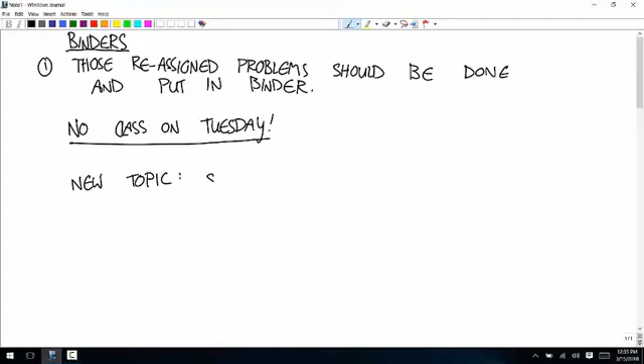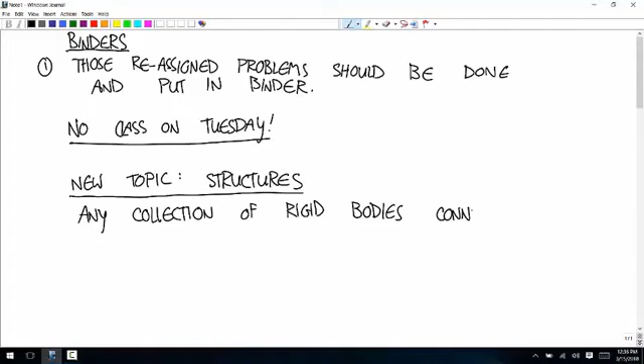Structures. A structure is any collection of rigid bodies that are connected by joints that are in static equilibrium.

If you have a collection of bodies that aren't in static equilibrium but are connected by joints, that's what we talk about in dynamics, and that's called a linkage.

So, in parentheses, a collection of rigid bodies connected by joints that's not in static equilibrium is called a linkage. Okay, so we're doing structures. It's very similar to linkages, but linkages are things that move.

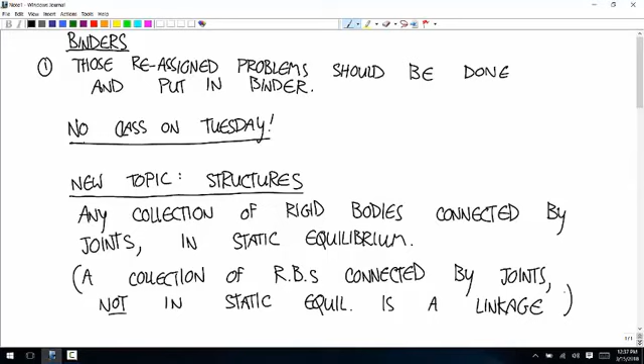Examples of linkages are drive shafts in an engine connected to the pistons, or the bones and joints in your body are a linkage.

Structures are like the trusses that hold up bridges, the frames of buildings, those kind of things. Any time you see stoplights on a big pole hanging out over the street with things connected to it to keep it from falling, that's a structure.

I do structures pretty differently than anyone else, and so I'm going to explain why, and we'll talk a little bit about the approaches that are used more often in statics. I just want to introduce the way that I'm talking about it.

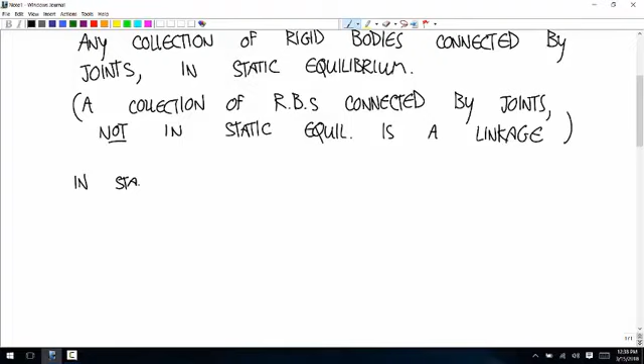In statics textbooks, and in a traditional approach to statics, structures are broken up into two categories.

The first one is trusses. And the requirement for a truss is that every member is a two-force member.

By the way, this is good stuff for quizzes, so pay attention to the stuff that I'm writing here. Anything where I'm making numbered bullet points and stuff, that's good candidates for quizzes. So every member is a two-force member.

Right, it's canceled. No, we'll just go to the next one that's scheduled on the syllabus. I think it's the 29th, maybe.

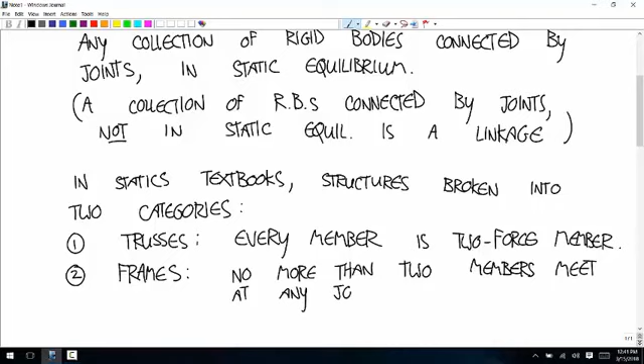And then the other category is frames. The requirements for frames are: no more than two members meet at any joint, and second, no external loads are applied at the joints.

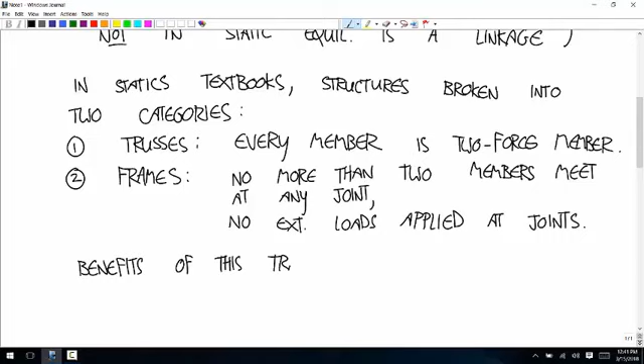The benefits of this approach—I'll call this the traditional approach—are first, a lot of times you get a big reduction in the number of equations, the size of the system of equations you have to solve is reduced.

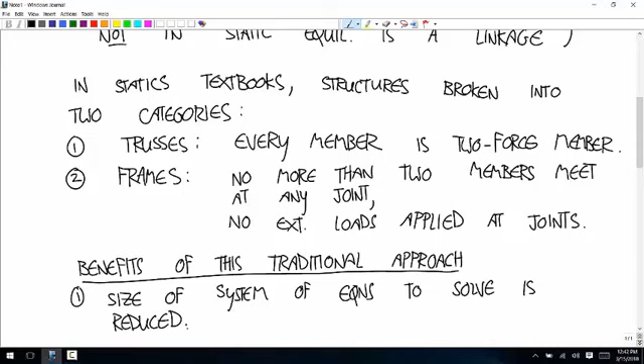Well, I said benefits, there's really only that benefit, but that's a significant thing to consider. It can be faster to do these calculations by hand.

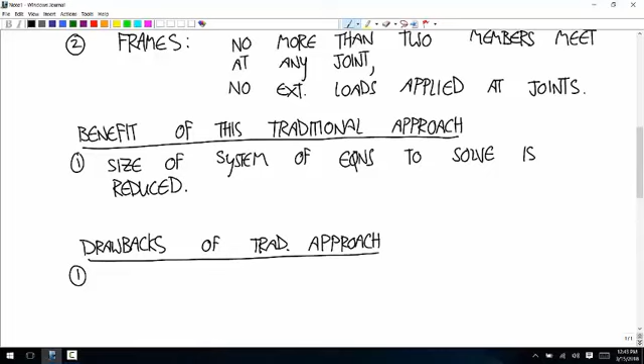There are two main drawbacks. The first one is that before you can solve a problem, you have to carefully classify it, and it's not always super easy, especially six months after the class, to be clear to yourself about which category you're talking about. So you need to classify the structure you're working on accurately in order to use the right technique.

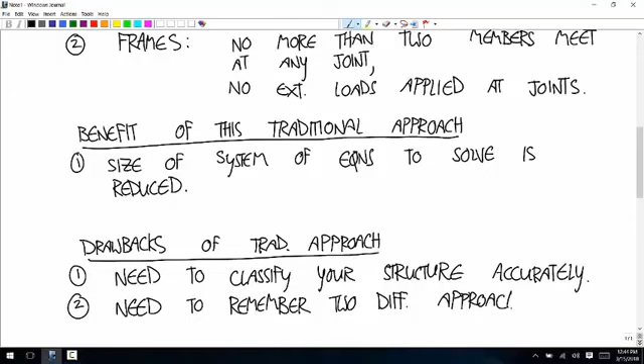And you need to remember two different approaches. I guess there is a third drawback: not all structures fit into either one of these two categories, so some structures aren't solvable with either of these two approaches.

Okay, so we're going to spend most of our time on our approach: a single method that works for everything. So you don't have to worry about remembering these two different approaches and classifying problems and stuff like that.

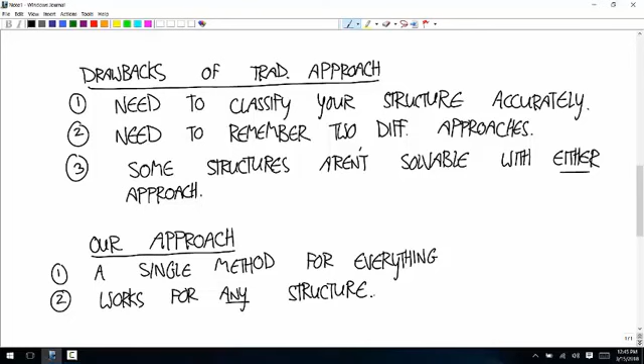It works for any structure, so there are no gaps in this. The downside is that in a lot of problems, if you classify them accurately, especially with truss problems, and use the truss simplification, treating it like a truss goes faster than doing this. So this is a slower way to do it by hand, especially compared to truss simplification.

But in defense of this method, these two approaches, like the truss simplification, people used to use this when engineers did hand calculations of gigantic trusses, estimating loads on bridges with tons and tons of members, and there was no easy way to use hand calculators or computers to do the calculations for you. I don't think anyone here is ever going to be in a professional environment doing hand calculations of big structures. If that's part of your job, either you or someone else will have written software to do it.

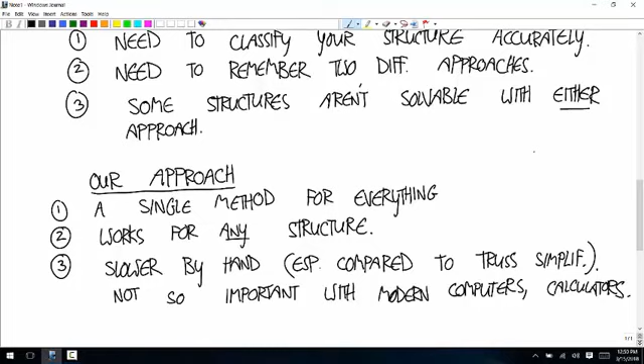All right, so what's the goal with structures? So what does it mean to solve a structure? What's the goal?

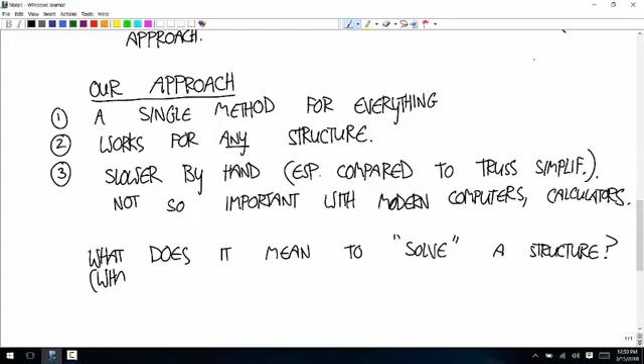Okay, let me just draw this. So let's say we have a collection of members like this, and a roller over here, and there's a force of 10,000 newtons there, 5,000 newtons there. So there's a structure—what does it mean to solve it?

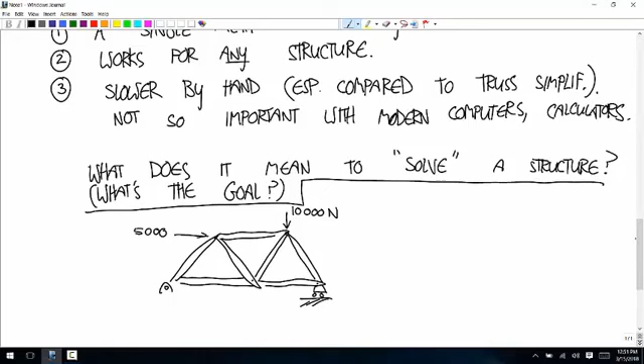It's solved when you know the external loads on each individual member.

Right now, first we'll treat this whole thing as a rigid body, and we can calculate the reaction loads here and here—that's all stuff you already know how to do. Once we do that, we know all the external loads on the entire structure as a whole. But we've solved this structure once we can look at this member and calculate all the external loads acting on it, and look at this one and know all the external loads acting on that.

So we want to be able to break it apart and know the external loads. You can probably imagine the benefit: once you have the external loads on one of these members, you have information you can use to figure out, am I worried about it breaking here? Am I worried about this one breaking? And that goes into the stuff we'll do when you take deformables.

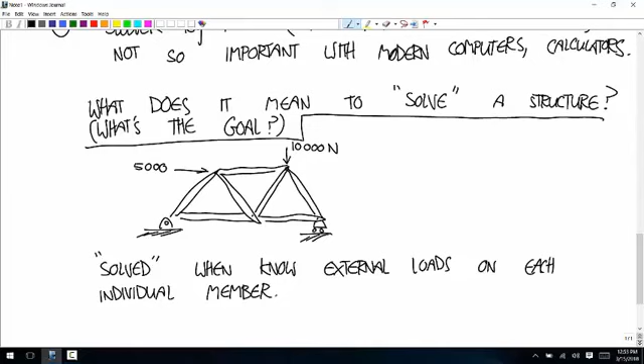So first, we're just going to think our way through it. Then after I'm done with that, I'll give you a set of general steps that you're just going to have to do a bunch of problems to ingrain. And by that point, you'll go outside, see structures everywhere, go home and calculate the internal and external loads. When you get to that point, you're really screwed.

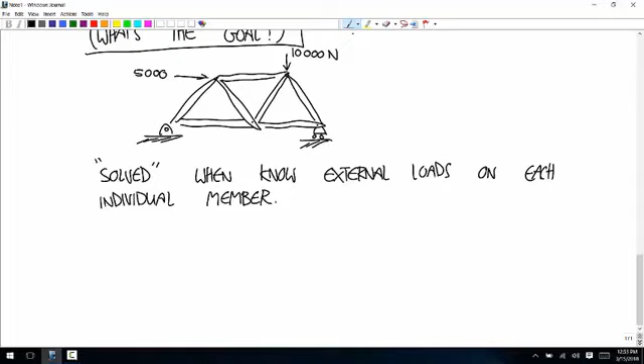Okay, so here's the first example. There's a pin joint on the left, connected to a member like that. It's connected by a pin joint to a member over here. This looks a little crooked, but it's supposed to be equilateral—I'm going to fix it.

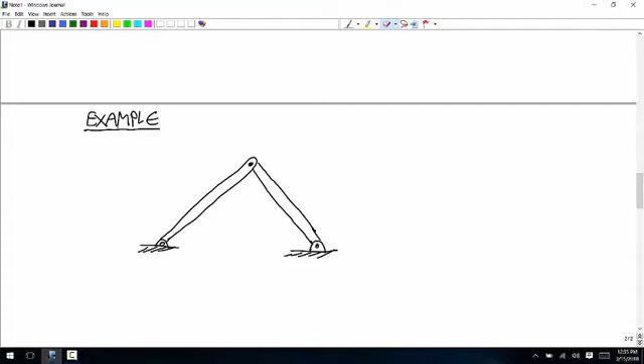Okay, and there's a pin joint connecting them here. And let's say that all these angles are 60 degrees, so it's an equilateral triangle.

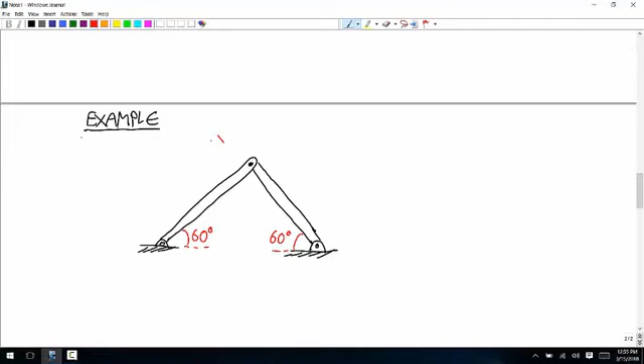And all the lengths are 1 meter. And there's an external load applied this way of 500 newtons.

And just so we can refer to these, I'm going to call the joint on the left A, the one connecting the members B, and the one on the right C. And then I'm going to call the member on the left member 1, and the member on the right member 2.

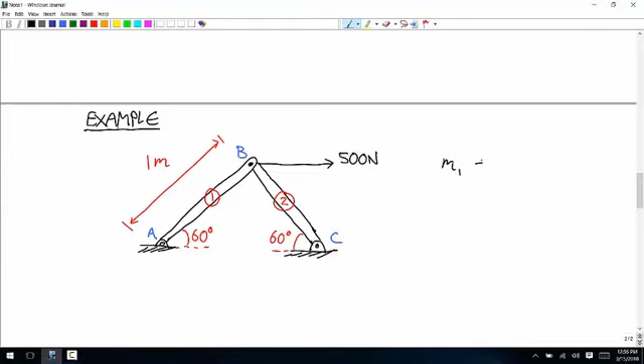And then I'm going to say that the mass of member 1 is equal to, what should we say, 10 kilograms. And that's also equal to the mass of member 2.

As structures go, this is a pretty simple structure, right? But just to bring out the point of the gaps in that traditional way of doing structures, this simple structure cannot be solved by either of the two traditional methods of solving structures. You could do this calculation if we ignored the weights, and the weight isn't going to make a big difference here. That 500 Newton force is a lot bigger than the weights of, well, I guess 100 Newtons. So it'll make some difference, but not that much. But using the traditional methods, you'd have to ignore the weights. If you want to put the weights in, you're stuck. But our way will work fine for this.

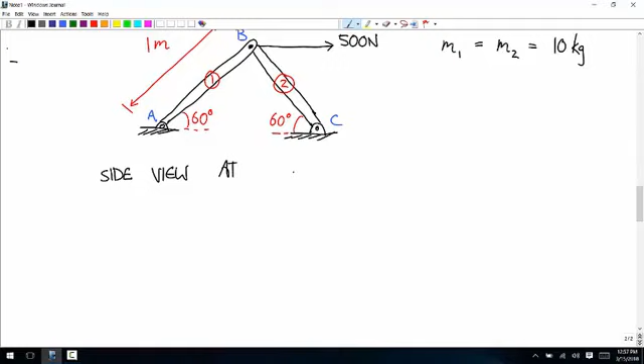Okay, so what does it look like up at the, let's think of a side view at joint B. Can you picture what I'm trying to get at there?

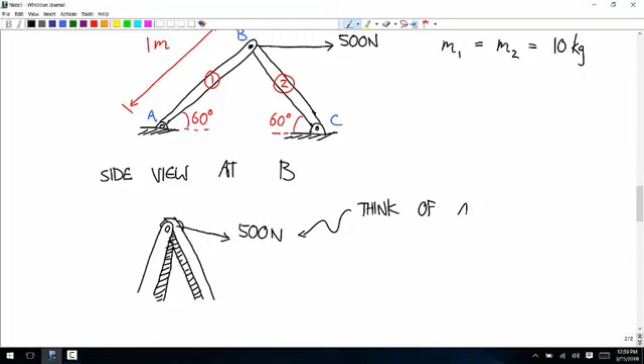And we're going to assume that that 500 Newton force is applied right at that joint. Here it looks like that 500 Newton force is applied to member 2, the way I have it drawn here. But it doesn't change anything in this problem to think of that force as applied directly to the pin that connects those two. We're going to think of this as applied directly to the pin.

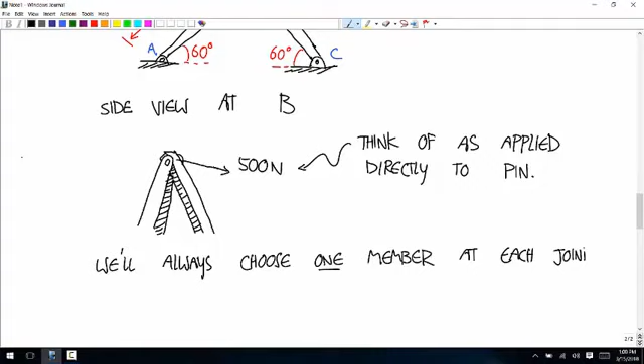And another thing that we're going to do, this is sort of a key thing in this approach: we'll always choose one member at each joint to lump the joint into. It doesn't matter which one, although I'll give you the way that I do it. You just need a consistent approach to which one. So what I'm going to always do is, this is member 1 and this is member 2. I'm going to always say that of the members connected at a single joint, I'm going to assume the pin is part of the lower number of those members.

So instead of treating the pin like its own thing, which it perfectly could be, I'm going to just, when I do free body diagrams, include that pin as part of member one. And so with my approach, this 500 Newton force is applied to member one, even though here it looks like it's applied to member two. It turns out if you had it applied to member two instead, it all comes out the same. But what you can't do is treat it like this 500 Newton force is applied to both of these two members. Then what you're really doing is treating it like this is a 1,000 Newton force and everything's off.

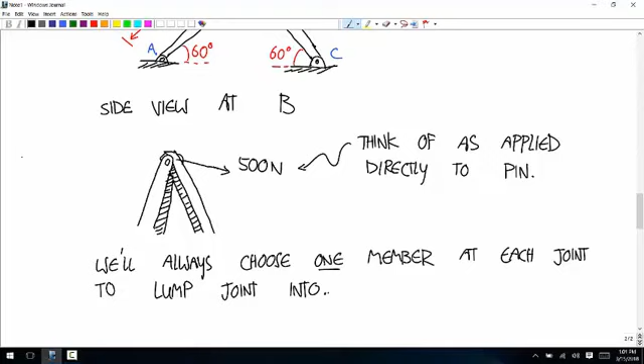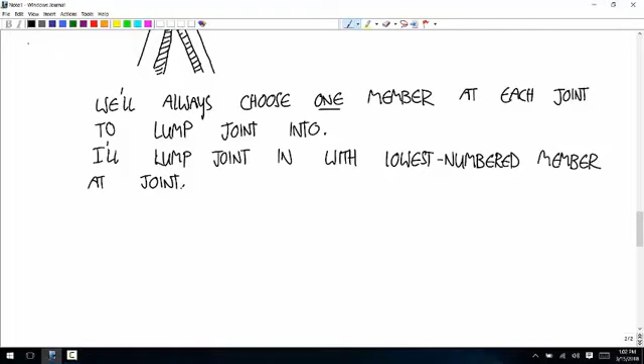So I'll always lump the joint in with the lowest numbered member that's at the joint. So in a really complicated truss, if you have a joint that connects members 15 and 12 and 9 and 40, the lowest numbered member connected to that joint is 9. So I would say the pin is part of member 9.

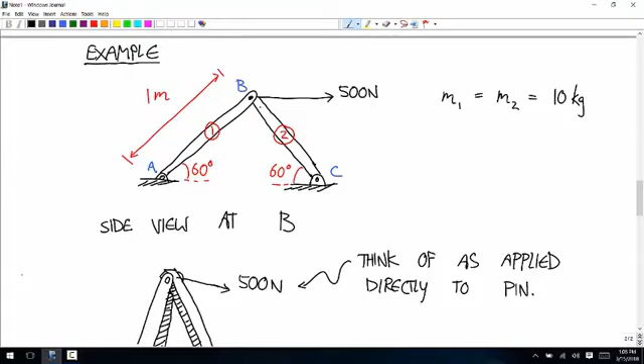Okay, well, if we're going to calculate the external forces on these members, we're going to have to isolate those individual members. So I'm just going to go through one by one. I'm going to first use Newton's laws for member 1. Then I'm going to use Newton's laws for member 2. We're going to have a bunch of variables, a system of equations, and as soon as you have as many equations as you have variables, you can solve it. So first, member 1.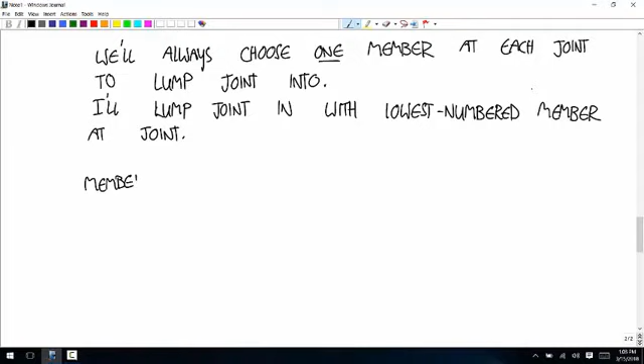What loads are applied? Yep, there's a 500 Newton force here because I decided to treat that joint as if it's part of member 1. I'm just lumping those two together. What else? Yep, there's a pin joint connecting it to the ground. I'll call that the force. Since that's joint A, I'll call that reaction at A. There's the weight, and that's acting at the center: 10 kilograms times 9.81, 98.1 newtons.

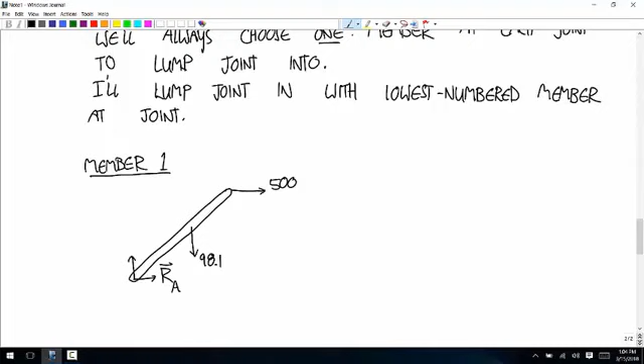And then there's one more. So if you go around the boundary looking for where the surroundings make contact with the boundary, there's one more contact that we haven't put in there yet. Yeah, there is the force that member 2 is applying to the pin, which is part of member 1. It's a pin joint, so that's an unknown force vector. And I'm going to call that the force on 1 by 2.

And I'll write out rho, force, moment.

Yeah, that's a great question. So the answer is no, we can't. Not yet. But when we isolate the other member, we're going to have a force on 2 by 1, which is negative F12. And so we'll end up with a system of 6 equations for 6 variables.

Okay, so I'm going to choose the about point here. You can put it wherever you want. I'll start out with the force RA. The rho vector is 0, 0. The force vector is RAX, RAY. Cross product is 0.

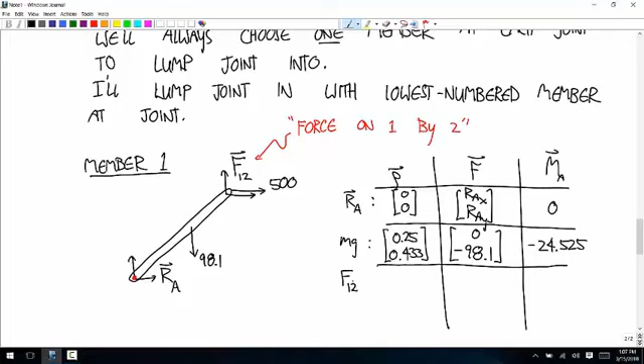And then the force F12, the rho vector is 0.5, 0.866. The force vector is F12X, F12Y. Cross product is 0.5 F12Y minus 0.866 F12X.

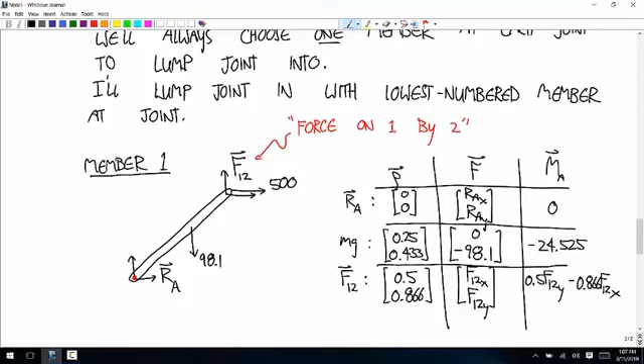And then the last one is the 500 Newton force. That has the same rho vector, 0.5, 0.866. The force is 500, 0. And so you get negative 433.

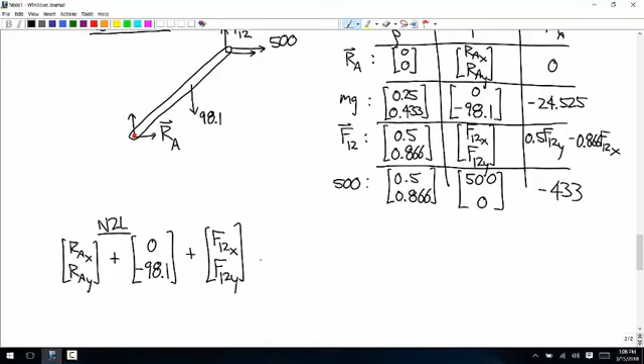So the equations, Newton's second law says RAX, RAY plus 0, negative 98.1 plus F12X, F12Y plus 500, 0 equals 0, 0.

And the moment equation says negative 24.525 minus 0.866 F12X plus 0.5 F12Y minus 433 is equal to 0.

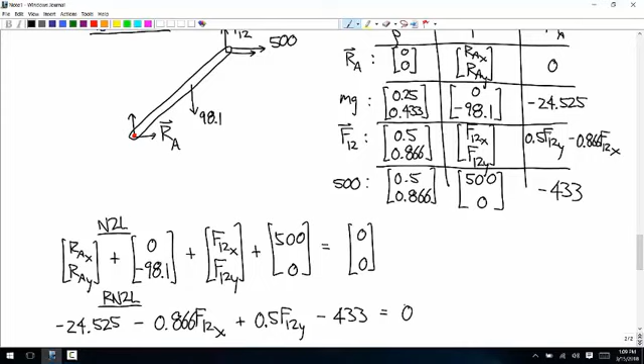Okay, so we did all that for these three equations. And like you pointed out, we have 4 variables and 3 equations. We can't solve anything yet. I'm just going to write out these 3 equations.

So our first one says, and I'm going to put them in the form that we're going to use for reduced row echelon form. So 1 RAX plus 1 F12X is equal to negative 500. Second equation says RAY plus F12Y is equal to positive 98.1.

And the third equation says negative 0.866 F12X plus 0.5 F12Y is equal to 457.525.

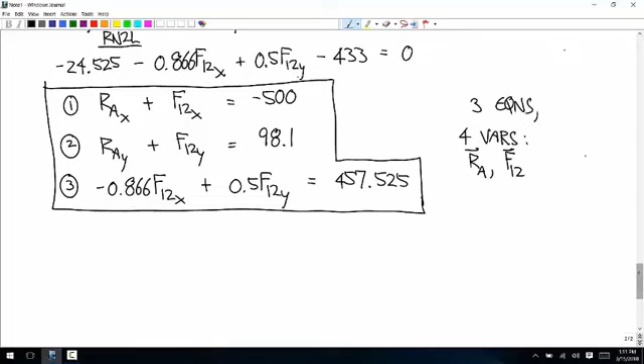Okay, so now we'll isolate member 2. There's a weight force of 98.1 at the midpoint. It's connected to the ground by a pin joint, so I'll call this unknown force vector RC.

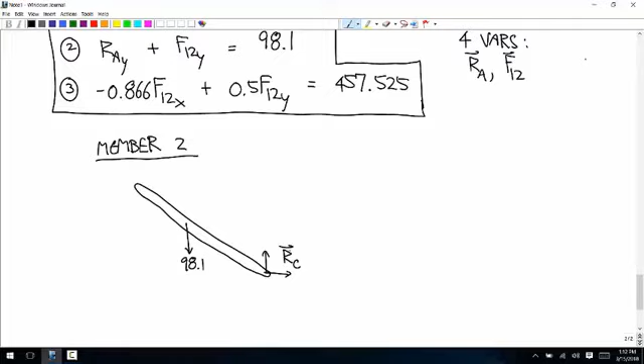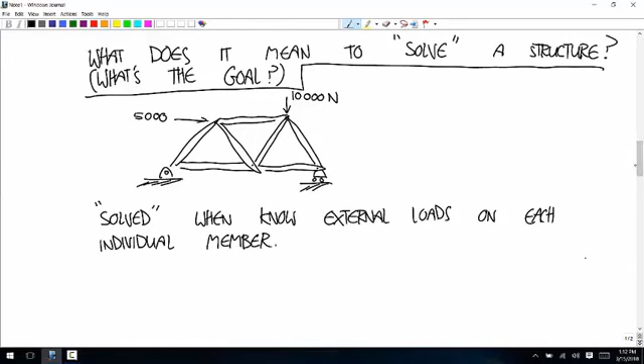Yes? This one is a pin joint. In the example I did before that, there was a roller, yeah. But for this one, they're connected by pins. By the way, if we were doing this problem where there was a third member like this, then we would need this to be a roller for it to be statically determinate. But that's a pin there. Basically, it's like a 3-member structure with the ground being the third member.

Okay, and then what's happening up here? This is the most complicated part. Always the most complicated are the joints where the 2 members are in contact. Well, the pin is part of member 1, so that 500 Newton force is not applied here. But this member does touch the pin, okay? And the pin is part of member 1. So there's a force on 2 by 1.

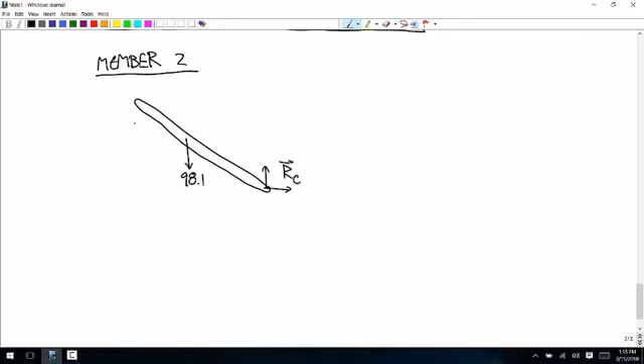If we called this variable the force on 2 by 1, we would have 8 variables in our system. We'd have the variables RA, X and Y components, F12, X and Y, F21, X and Y, and RC. And we wouldn't be able to solve it. But Newton's third law says that F21 is equal to negative F12. And so we're going to write this in terms of a variable we've already defined, and then we only have 6 variables in our system. Okay? So that's a key part of this.

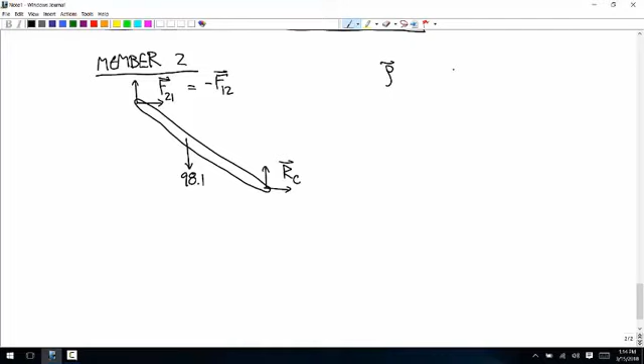Moment. I'll put the about point down here for this member. So first, the force RC. The vector is 0. The force vector is RCX, RCY. 0 moment.

Then the weight force. The rho vector is negative 0.25, positive 0.433, and the force vector is 0, negative 98.1. And that cross product is positive 24.525.

And then the last one is negative F12. The rho vector is negative 0.5, positive 0.866. The force vector is negative F12x, negative F12y. Those negatives are because of Newton's third law. And then the cross product is 0.5 F12Y plus 0.866 F12X.

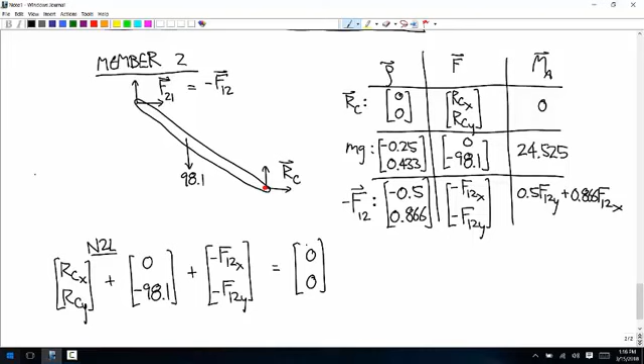And the moment equation says 24.525 plus 0.866 F12X plus 0.5 F12Y is equal to 0.

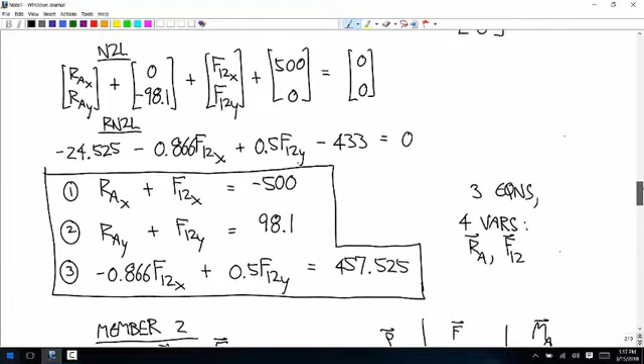Yes? Yes, and I think the easiest way to make sense of that for yourself is just to think, when we isolated member 1, we used the laws of statics to come up with a bunch of variable relationships that are true. Okay, they're true because we followed the rules of Newton's laws. And then separately, we came up with a bunch of relationships between variables that are true using Newton's laws for member 2. And if all of those are true, then they all have to be satisfied at once. Does that sort of make sense?

Yeah. So yes, between members, you can change the about point. Question? Yes. Mm-hmm.

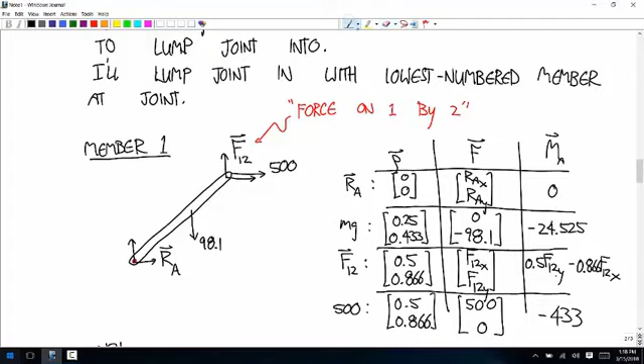Okay, so now we're going to come up with equations 4, 5, and 6. Equation 4 says, I'm going to put it in a different order: negative F12X plus RCX is equal to 0.

Oh, you better not close. I'm safe. Ah! That better come back, or I'm going to freak out.

Equation 4 says negative F12X plus RCX is equal to 0. Equation 5 says negative F12Y plus RCY is equal to positive 98.1. And equation 6 says 0.866 F12X plus 0.5 F12Y is equal to negative 24.525.

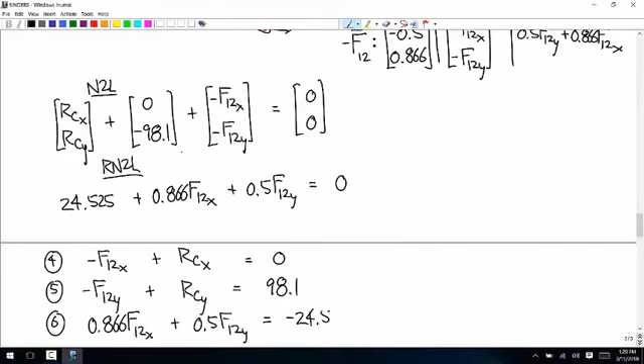Okay, so now we have 6 total equations. What's our list of variables? We have the vector RA, we have the vector F12, and we have the vector RC. So 6 equations, 6 variables. We can solve it.

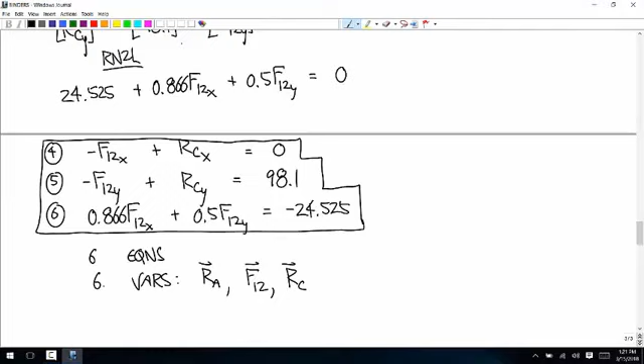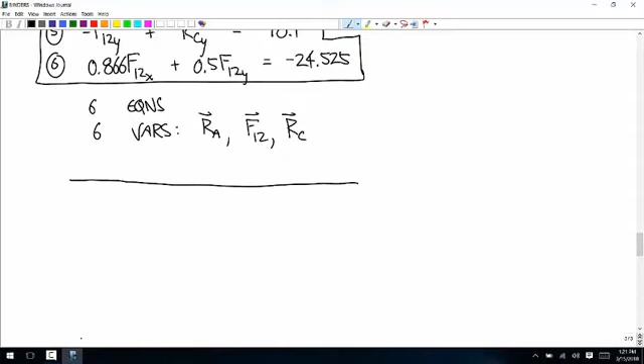One thing worth noticing is you can't really make a structure any simpler than this one, and that's already 6 equations and 6 variables. Every new member that goes into the structure adds 3 new equations if we're doing a 2D problem. So if you have a structure made up of 10 members, which still isn't the biggest structure you see outside or whatever, that's a system of 30 equations for 30 variables. It adds up pretty fast. You can understand why people would want to come up with an approach to doing structures that didn't require that many equations if they had to do them by hand. We like equations, though. We say the more the better.

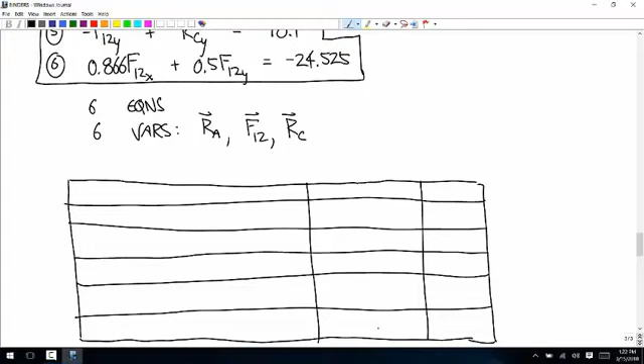Okay, so 6. Our equations are the rows: 1, 2, 3, 4, 5, 6. And our variables, I'll call them RAX, RAY, F12X, F12Y, RCX, RCY, and then the constants.

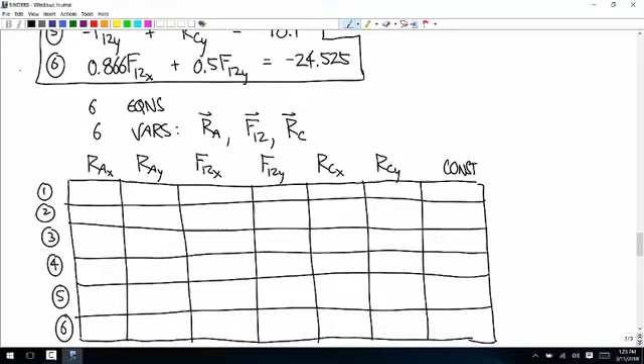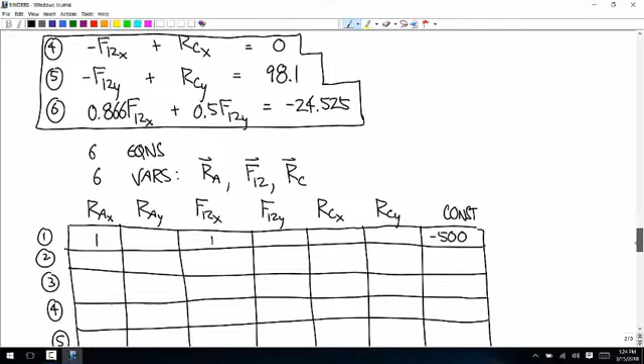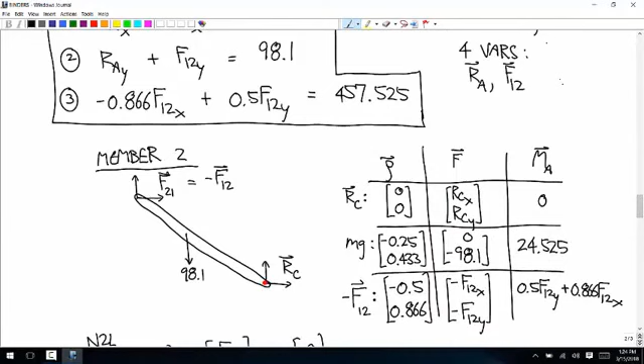From equation 1, RAX's we have 1, F12X's we have 1, and the constant is negative 500. Everything I leave blank is going to be 0. Equation 2, RAY's we have 1, F12Y's we have 1, and the constant is 98.1. Equation 3, F12X's we have negative 0.866, F12Y's we have positive 0.5, and the constant is 457.525.

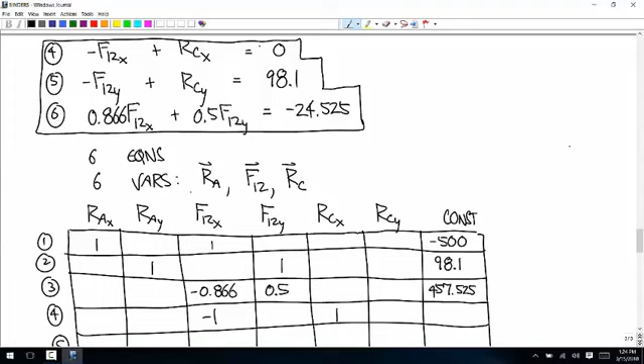Equation 4, F12X's we have negative 1, RCX we have positive 1, constant is 0. Equation 5, F12Y's we have negative 1, RCY's we have positive 1, and the constant is 98.1. And then equation 6, F12X's we have 0.866, F12Y we have 0.5, and the constant is negative 24.525.

Okay, so I hear people doing this. Let me know when you have answers.

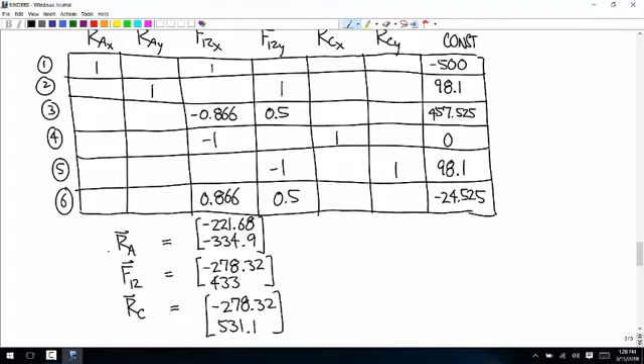Now let's take the last step, and we have these values of these forces we defined. Let's put them back into the free body diagrams and show what the external loads are on each of those 2 members.

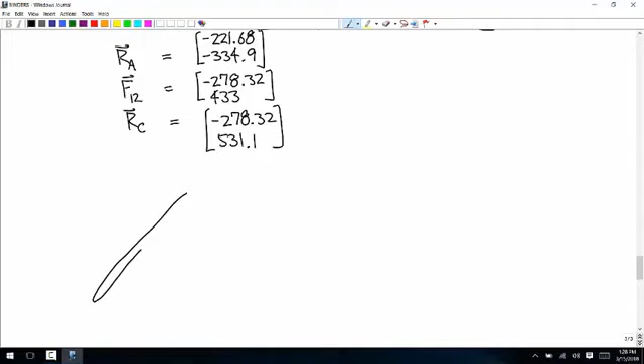So for member 1, we had a downward force of 98.1. We had this force vector RA over here, and that's negative 221.7, negative 334.9. And then up at the top, we had 2 forces: the 500 Newton force, and then the force vector that said negative 278.3, 433.

I'm going to rewrite that, because any force vectors acting at the same location you can just lump into a single vector. So down here we have negative 221.7, negative 334.9, plus the weight force of 98.1. And over here, to add up those vectors, we have this vector of 500, 0, added to this one. 500 minus 278.3 is 221.7. So we get positive 221.7, positive 433. That's all the external loads on that member.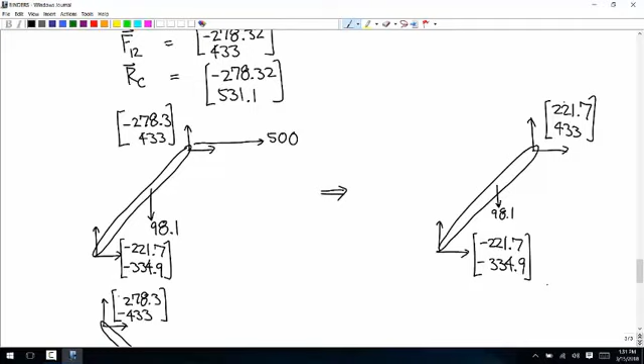Then for the other member, up at the top, we have negative F12, so I'm going to take the opposite of both of these values for F12: positive 278.3, negative 433. Then we have the downward force of 98.1. And then at C, we have negative 278.3 and 531.1.

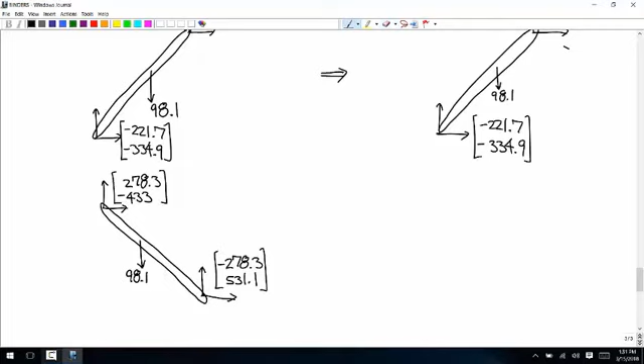Basically, all of deformation analysis is about taking numbers like this and figuring out, for the cross-sectional shape and the material we have, how concerned are we about this deforming, like having permanent deformation? How concerned are we about it breaking? Where are we concerned about it breaking? Yep, deformation is basically all an introduction to stress and strain.

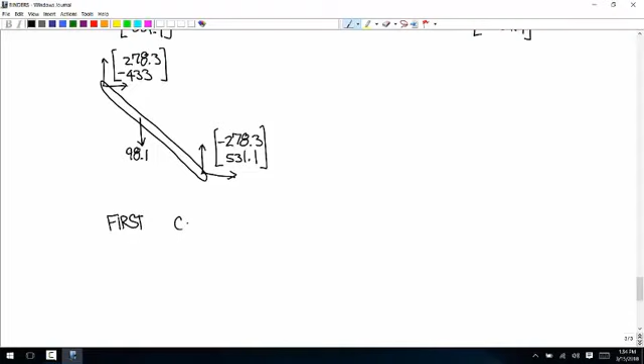Here's a first comment on the truss simplification: if we ignored the weights, we could use the truss simplification to do this.

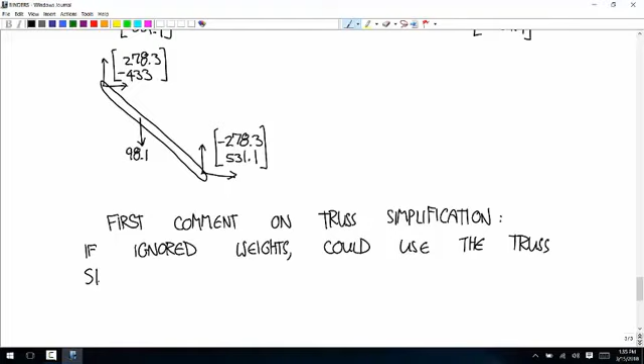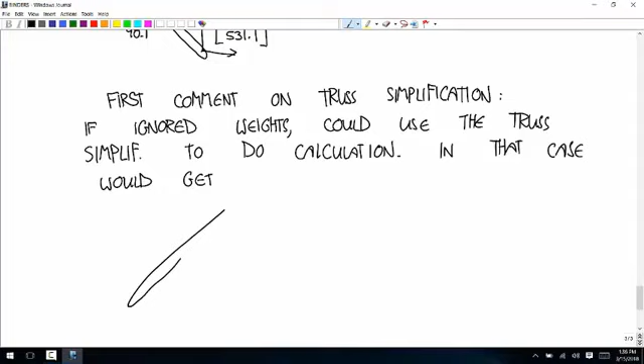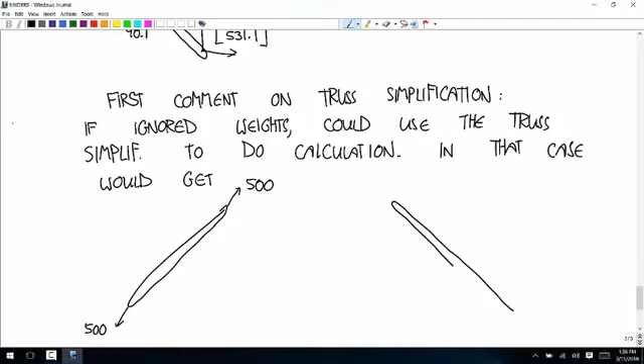In that case, we would get exactly, for the external loads on member 1, we'd get tension of 500 exactly along the axis of the beam. And for member 2, we'd get compression exactly along the axis.

And actually that sort of suggests what that truss simplification is based on. The way of calculating trusses that lets you cut out all these equations is based on the idea that if the only forces acting on these members are at the ends, and you're in static equilibrium, then all the forces have to be along the axis of the beam. And if you know that, you can imagine knowing the directions of those forces before you go into it, so you can cut out a lot of the variables instead of talking about these as two-dimensional unknowns.

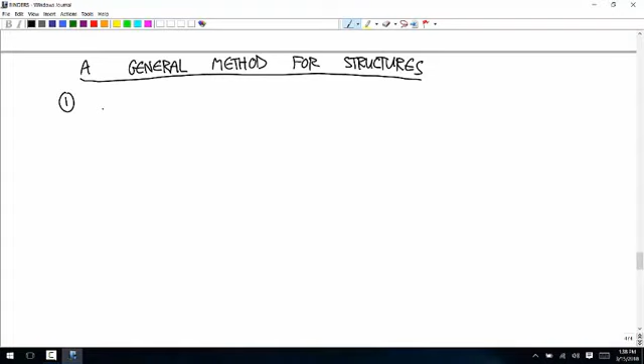So here's a general method for structures. First, number all the members. And letter all the joints, just so you have something to refer to.

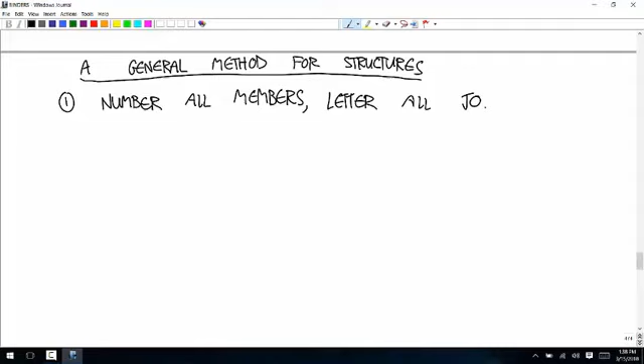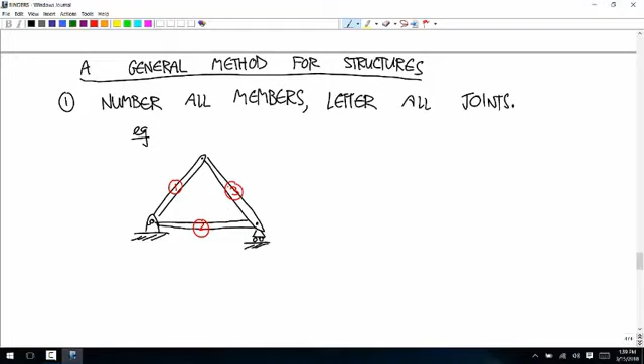One thing that's going to be useful when you do this is, let's say we have a structure like this. This time, let's say we have a third member put in there. All of these are pin joints. So let's say we call this 1, 2, 3. It doesn't matter how you label them. And then A, B, C. One thing that's going to be useful a lot of times for figuring out what forces are acting on what

is to do a side view of the joint. In this case, if I was looking at this from the side, like from the right side, I would see member 1 here, member 2 here, and a pin connecting them. Member 1 would be diagonally away from me, member 2 would be diagonally towards me. And then because I'm treating the pin as if it's part of member 1, I'm going to just connect those two like that. And then you can think of this as everything shaded is member 1, everything white is member 2.

This approach will be really useful once we start getting more than 2 members connecting in a single joint.

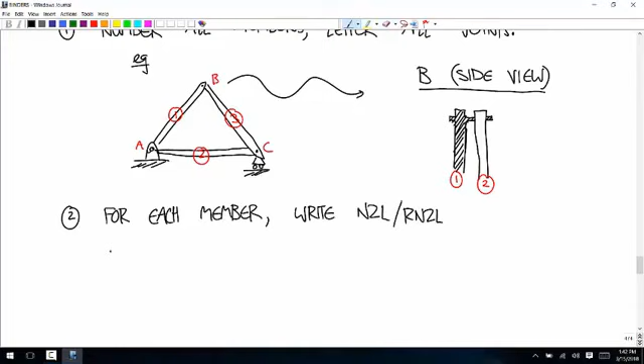Second, for each member, write Newton's second law and rotational Newton's second law. There need to be free body diagrams for each of those anytime you use those. And be sure that you use Newton's third law to write your equations with the smallest number of variables. That's what I did when I represented F21 as negative F12 in the example problem.

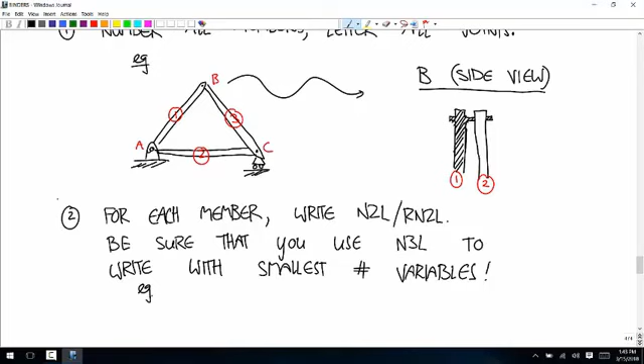So for example, F31 is equal to negative F13, and so you'd replace F31 by negative F13 whenever it came up. Then the last step is to write your system of equations as an augmented matrix, and use reduced row echelon form to solve.

Any questions about the idea of this? Okay, so we're going to spend a ton of time getting practice over the next couple of weeks. Like I said, this is probably the biggest, the main topic in this class, so we'll make sure we spend a lot of time on it.